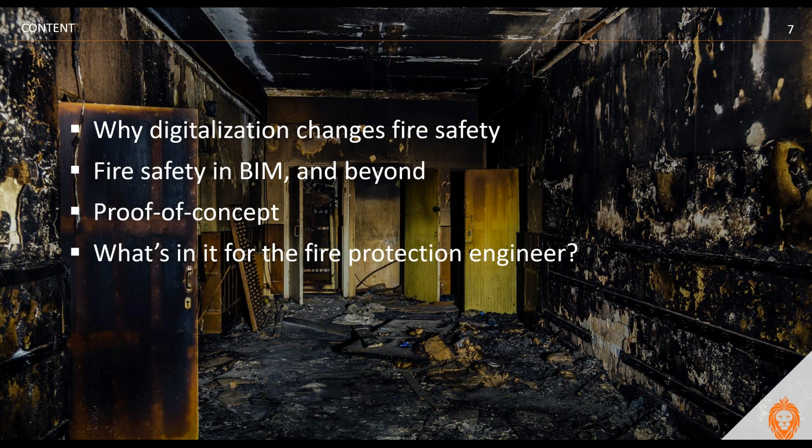Already 17 years ago, Michael Spearpoint, who I think a lot of you know already, he's with OFR in England and is a research leader. He wrote a piece in the Fire Protection Engineering magazine in 2003, saying that at this stage it is important that the fire protection engineering community be aware of the developments in building product models to avoid being left behind. And if we look back, we have missed the train.

We see that other disciplines such as architecture, structural, MEP have been working in a BIM environment for quite a long time now, and fire safety has, while using some tools to a certain degree, not really been in the same playing field as the other disciplines.

No, we're not working in a streamlined workflow with the others in the design team, but we see there might be a possibility to catch the train, as Michael said. Definitely.

To highlight this from the Scandinavian point of view, I'd like to start with an example. This USB stick is a symbol to me of where we are, or were yesterday. I could also have shown a drawing with markups that we still see being used today.

Everybody today is talking about BIM and sees different aspects of it. Just to make it clear in a good way, BIM could be like the 3D model that you could use and see, making it more visualized to understand building information.

But from our point of view, we see it more as a working process to make it a more efficient way of working together, to find a better process that includes different kinds of professionals within the AEC team. It's also about having the right information from the early stages when you plan or design, moving over to construction, and how you can manage and operate your building over time.

And we see more and more design team members or stakeholders in our building projects using BIM as a workflow and using the intelligent 3D model that is produced by it.

They have seen the value, but the greatest value comes when every part works in a more efficient and streamlined way.

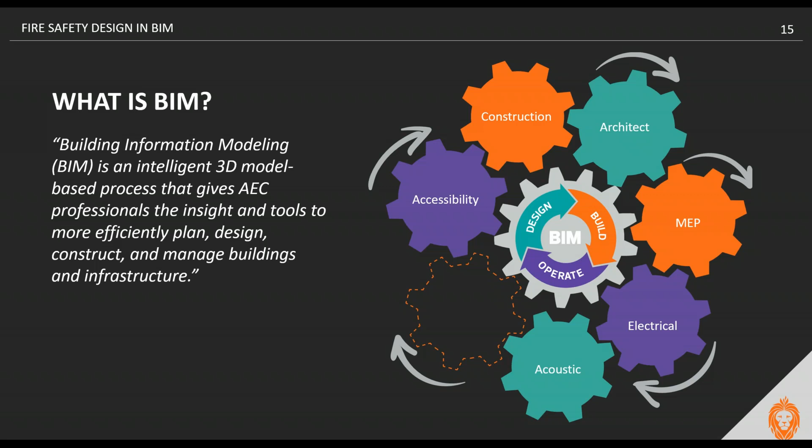One thing we see is that regardless of the regulatory setting we work in, or the design approach we use, we have the same need for information management.

We have different regulatory systems with standards and codes, and simplified, you can see two tracks: either the code compliance way, using deemed-to-satisfy solutions and prescriptive codes to reach a certain fire safety design, or the engineering approach, or performance-based design.

In the end, we set a design and end up with product specifications. The ways of reaching these specifications may differ, but in the end we still have fire compartmentation, different types of fire protection systems, and different fire ratings of the components in the system, and so on.

This type of information is vital to ensure it follows through into the construction phase and into operation and maintenance. And as you point out, working in a more digitalized way, or in a BIM workflow, is in some way independent of how you work with fire safety.

Whether it's more about code compliance or based upon analysis from fire protection engineering, it's about communicating the result to other design team members in a better way, so we could have better focus on information. I'd say that to us, BIM is more about the workflow than the technology itself.

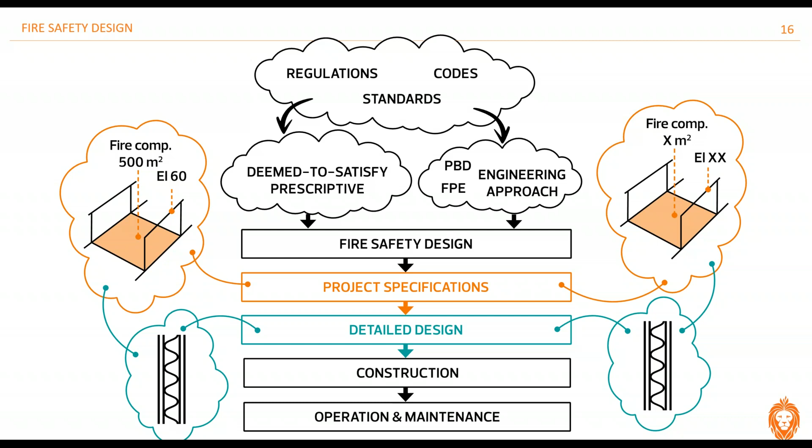So we'll now be showing you an example from Scandinavia.

Over the last years, we've been looking into how to integrate and work closer together, and we looked into how we could take the first step to work in our BIM workflow, and how we could find the core issue of fire safety.

We started to help the fire safety industry find the right tools to be able to work together.

One thing we see here in Scandinavia is that we usually work with different kinds of CAD software, and one of the biggest is Revit. So we've been looking into having some kind of add-in tools for Revit to work with detailed specifications of fire compartment levels. We could show you one example of how it will look.

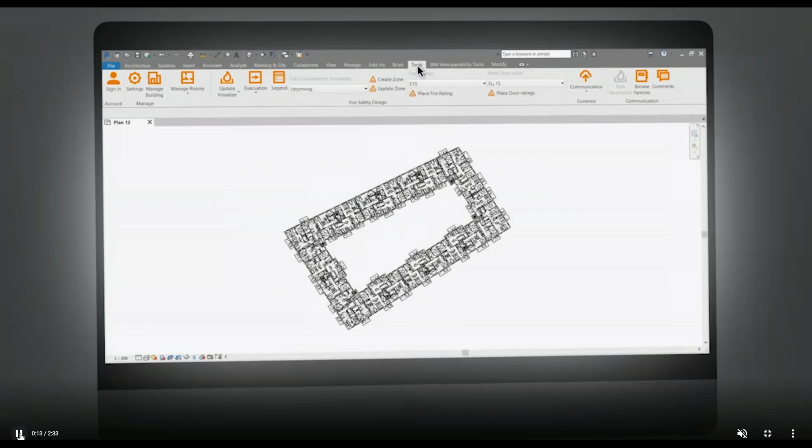Just a very short example - I'm showing here a project with a model. It's a residential building where we've been looking into how we could work with fire compartmentation and do some optimization, taking the workflow we have today when we do fire safety design in Scandinavia and transform it into a workflow that fits this kind of CAD software, so we can communicate and work together with the other disciplines in the design team.

So what we saw here was the creation of the fire compartments on a detail level in the model, where we then may add the relevant fire safety properties, such as the fire ratings of the walls or the doors, for example.

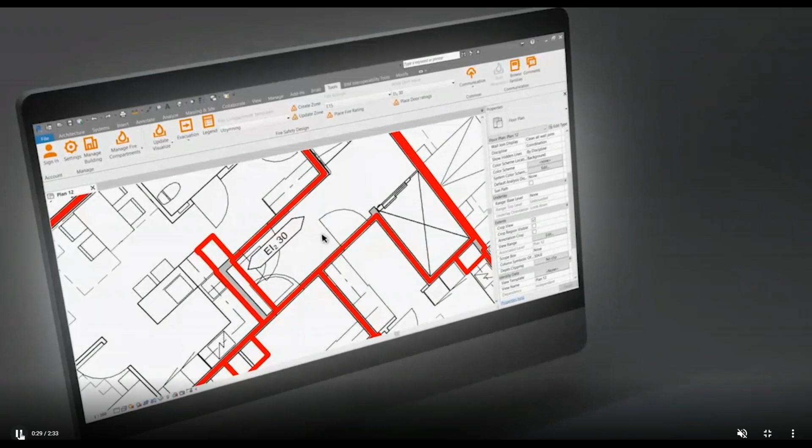And it's also a way of building this kind of more technical driven 3D model. So you have your own fire model, where you can integrate and communicate all critical fire safety information and data in a 3D visualized format. I think you're highlighting a really important thing here, Johan, that communication is what it's a lot about.

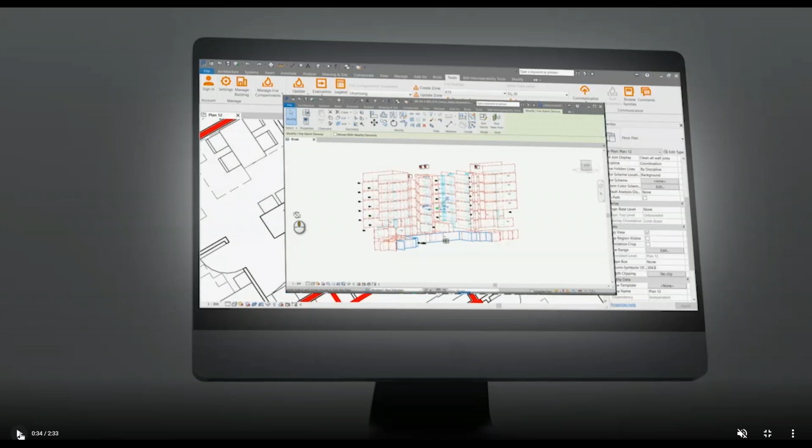We can communicate fire safety more efficiently, especially due to the complexity of fire safety itself. It's quite difficult for others to understand what we've been doing and working with at the time.

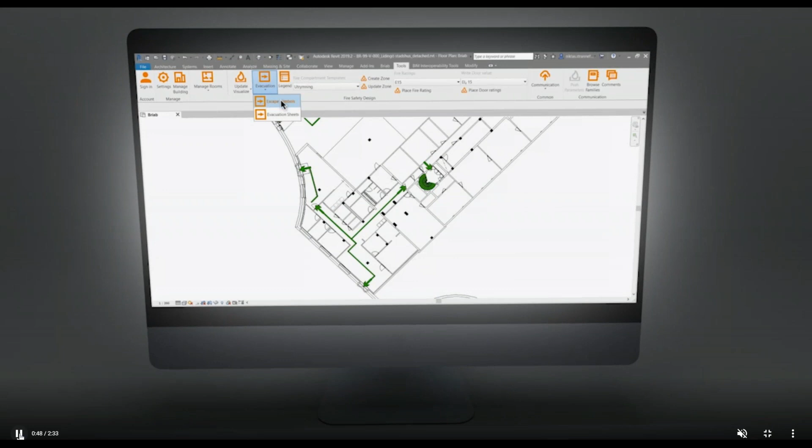Given that we have the information in a more digitalized format, it makes it possible to do a lot of optimization - for instance, doing evacuation drawings automated, so you have all the information you need to communicate it and print out your evacuation plans. And by having the core information in the model as one source of truth, it's much easier to create these life and safety plans.

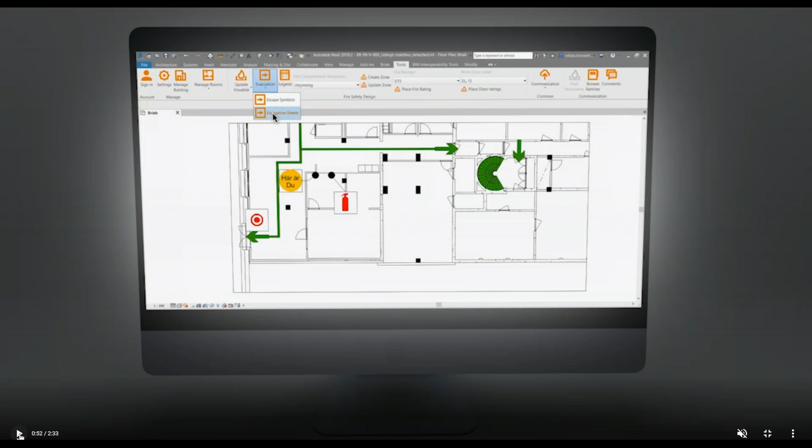And especially to update it, because it's an iterative process over time as well. It's also really easy to keep track of changes that the architects and other disciplines do - we may see these changes and incorporate them easily. Also about communication, getting that information from the architects is really valuable, like we see.

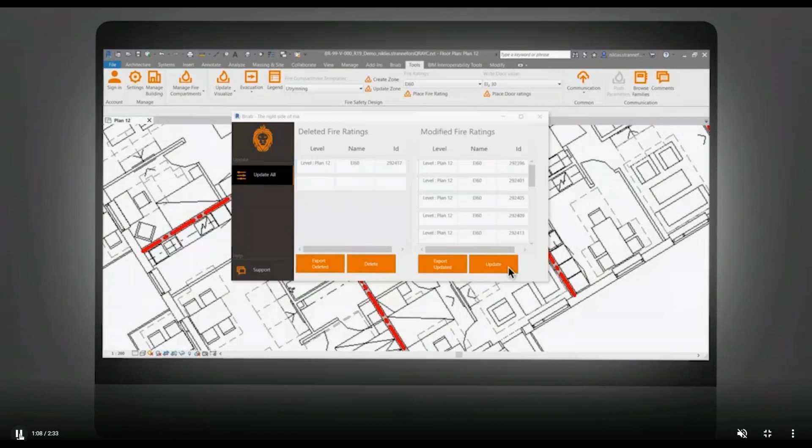And this is just one example of how it could be used to integrate fire safety and the result of fire protection engineering into a more data-driven workflow.

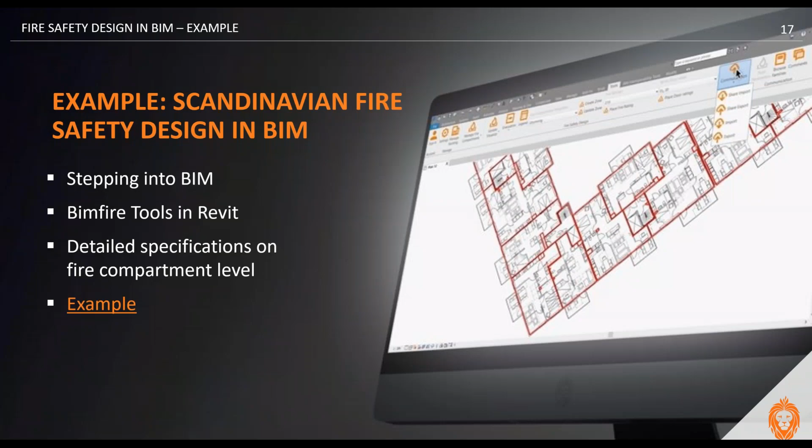But just to highlight how it will work in a more process-oriented way, we see that by starting to work in a different way with the focus on data and fire safety data, it gives us a better understanding and a better way of doing our fire protection engineering and analysis over time. I will show you some examples of that later on.

But it also gives us the possibility to be more efficient in the communication of time, and also to push towards a more detailed design approach, where we know that we have the right information with us, so we could be able to choose what kind of product to work with to ensure that we have the right quality of the chosen products over time.

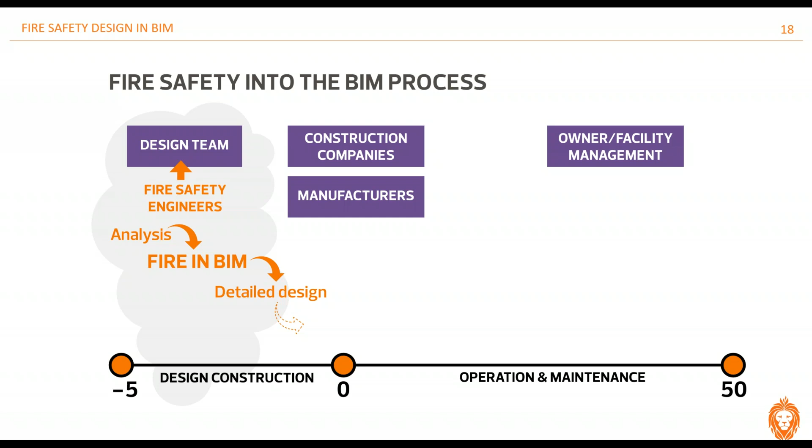And given this workflow, we have been using it for one of the biggest wooden office buildings in the world. It's called Magasin X, where we have been working with fire safety in a BIM environment and been able to have our own fire model with all the critical fire safety requirements.

And that has been like a baseline for the fire safety requirements that we've been working with, and it makes it easier to communicate to the architect and ensure right compliance. Especially since it's a wooden building, it has a lot of fire safety issues to take into consideration.

Yeah, the details become really important, and something that we see is that the Swedish timber industry is really progressive here. It's to a large degree prefabricated with really high-level quality assurance processes, and they are quick to adopt digitalization - they are really in the forefront here.

And Magasin X is just in the start of their design process, so we will see how it ends up during the detailed design of the building process.

And when it comes to the fire protection engineering, we have been working with a BIM workflow when doing a lot of analysis over time. And from an ASET point of view, by having a BIM-based product, it makes my work as a fire safety engineer much easier.

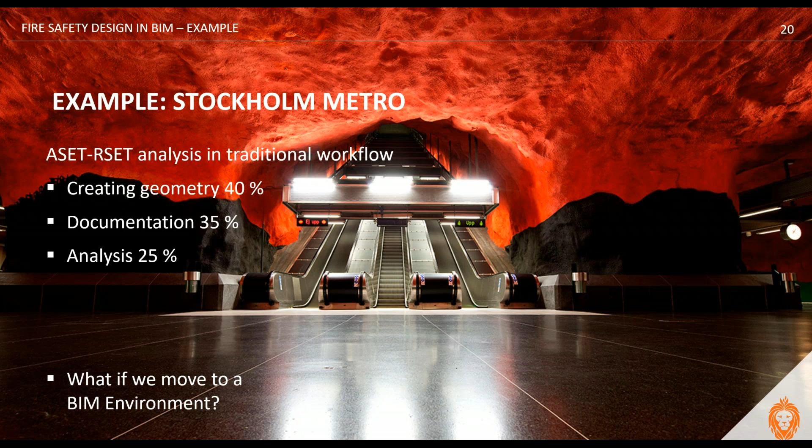But in this project, we saw an increase, or a change in focus, where we could focus more on the analysis and being engineers instead of building models or doing the documentation.

And we changed the focus, so the fire safety analysis was about 50% instead of 25%. That gives a much better value in the end.

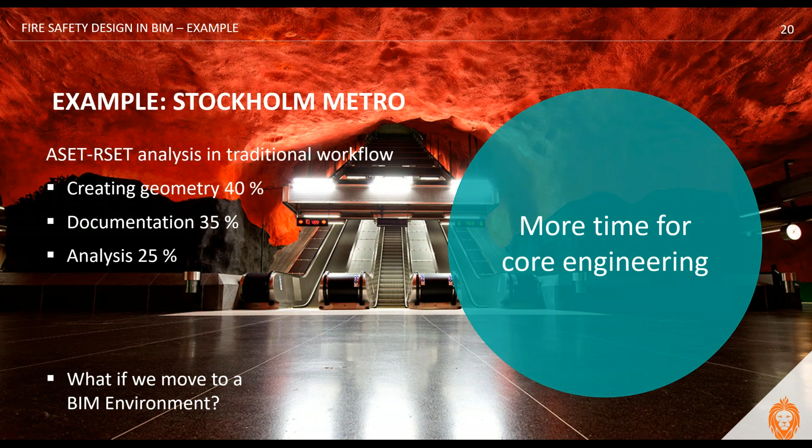And when it comes to communication to the detailed design, we also see that it's much higher quality in the information given to different stakeholders, and it makes it easier to find the right system and product that is in line with the fire safety requirement. Especially it's about joint review and clash control that ensures we don't have major clashes, so it could improve the quality and reduce cost over time.

By working in this way, we found one clash, and by not handling this one in the detailed design stage, it would have cost about 1 million SEK instead of 25,000 SEK in additional consultancy.

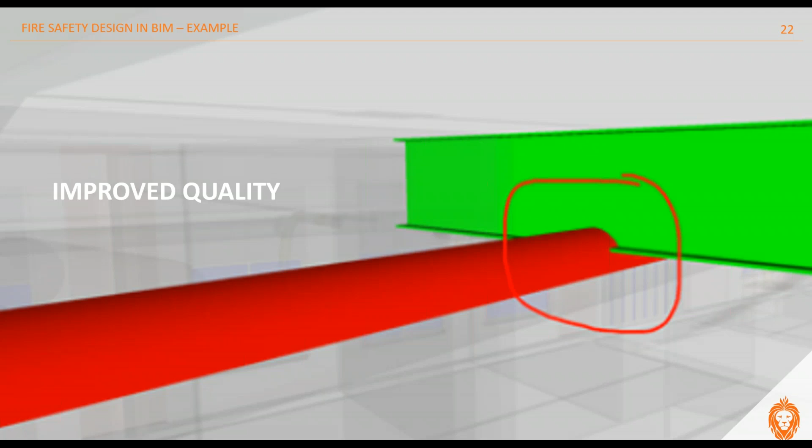But as we've seen and talked about, we see that BIM is one important step to start working with it, and it's more about the workflow and the processes to integrate and be a better team player. But it's certainly a way forward.

The true value for fire safety is about transforming and having the information with us from initial design down the line to the actually built building. Fire safety adds value for the one who's going to live in the building, the property owners and his clients, and it's for the end user.

And for that cause, we see that we need something that is beyond BIM, and it's about transforming information in an unbroken chain. Without proper information management, we will always be second in line.

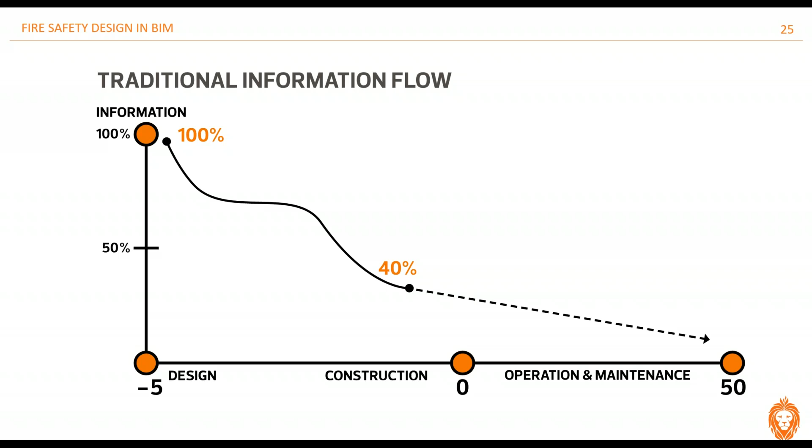And if we connect this to BIM and fire safety that we're already working with, we see that we need something new. We need to manage data in a new way to ensure this digital information flow, and we need that to be able to work with assurance and compliance in a more efficient way, compliance in a data-driven process. So transparency, accountability, and audit trails is what gives us ground for this high level of fire safety in practice.

Exactly. It is about taking all the good engineering work we do and trying to communicate it and ensure that information will live over time. And it's about breaking the silo effect as we see fire safety have over time.

It's also about a business model change that has to come to be able to change the way we are working and be able to focus on value adding instead of selling hours. But we also see a lot of problems on the way that we have to handle, like legal aspects and who's taking responsibility of what areas.

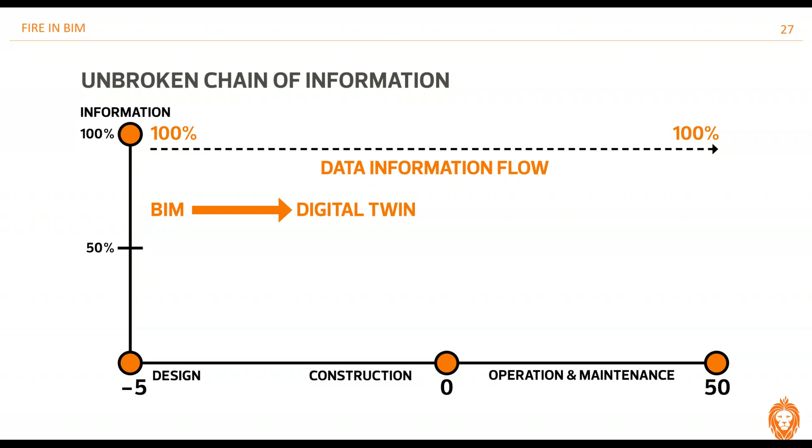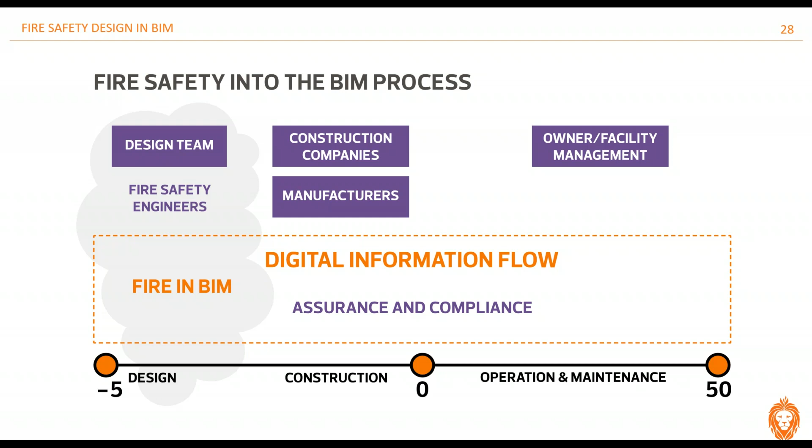So what will be the upside for fire protection engineers in practice? We see earlier fire protection engineer involvement with the design team, so fire safety is being addressed at an earlier stage, increasing its influence and ensuring it gets done right from the beginning, which reduces costs. Being able to do a better analysis at an earlier stage adds additional value.

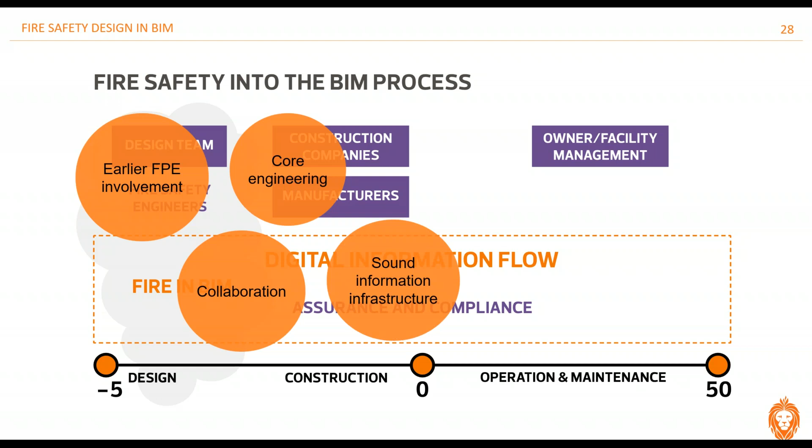Reducing the time for routine tasks gives us more time to do core engineering, where we create bigger value. We'll have more ground for collaboration, and we'll have a sound information infrastructure, which has huge potential, opening up many new different applications.

We also see that this is improving quality as a whole. It's easier for the business itself to know that we have the right quality, and in the end it's about end client value—meeting the client's needs and ensuring they get what they want in their products. For all stakeholders, this means less risk because we have bigger transparency in the process, both from a product and a business perspective, and for society as well.

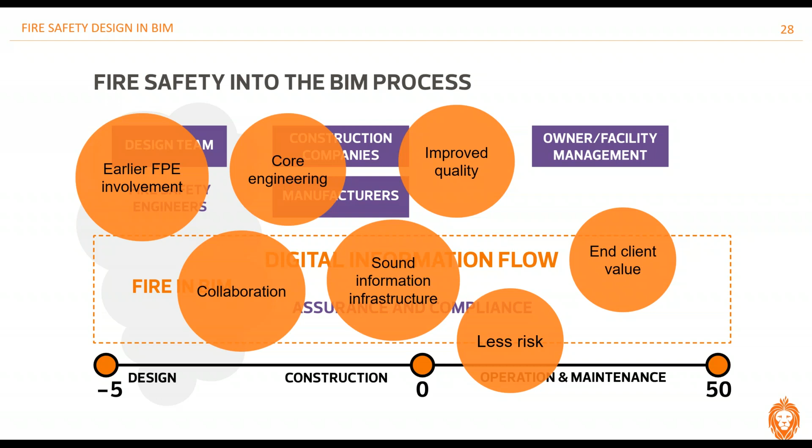So we're getting to the Q&A soon, but we'd like to wrap up with the risks and challenges. Given the initial work we've been doing, both in actual projects and from a research point of view, we've seen the potential and that it works in practice, but we've also realized there are some risks and challenges within the building industry and the fire safety industry itself.

One of those is about legal aspects—who's taking responsibility over what, and how can we ensure that in a good, sophisticated way?

We also see the traditional business model transforming as we want to make things more efficient. We see new competence requirements within the company—knowledge we haven't had before that we have to recruit and bring on board for fire safety work—and also the acceptance of change within a company, but also within the industry itself.